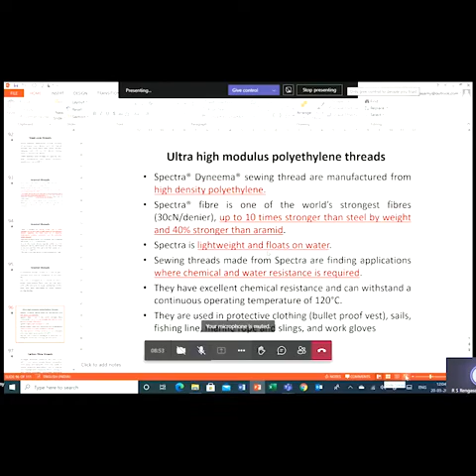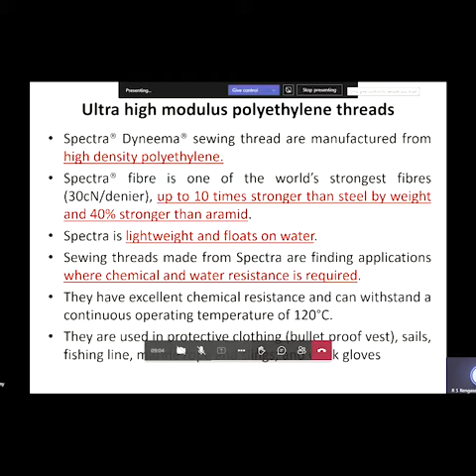So there is one category of thread which has very high strength. The polymer is called ultra high modulus polyethylene. And using this material, there are two companies in Europe and USA. They are marketing Spectra Dyneema as the fiber, and using these fibers, sewing threads are manufactured.

This Spectra fiber is one of the strongest, which has around 30 centinewtons per denier, up to 10 times stronger than steel by weight, and also 40% stronger than the aramid, especially the Kevlar fiber, the para-aramid fiber. And its density is very low. It can easily float on water. And another plus point is it has good water resistance and chemical resistance. Many of the chemicals will not affect this polymer. And temperature resistance is only up to 120 degrees because it has a low melting point.

And since this is the strongest material, now for the bulletproof vest, the panels are all made from this Spectra Dyneema material made from the filament yarns. So these panels, maybe 7 layers, 10 layers, they all have to be joined together by means of the sewing threads, so the Dyneema Spectra sewing threads are used.

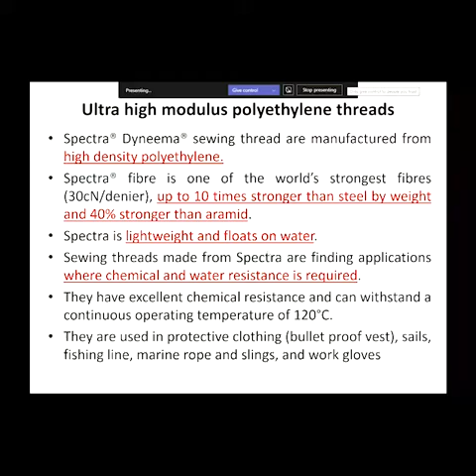Coming to carbon fiber threads, it is very expensive, and it is used only in the pre-impregnated composite. So already the textile structure or non-textile structure like 3D woven fabrics, biaxial woven fabrics of different configurations, are made using the carbon fibers, and this is called the pre-impregnated composite.

And this has to be joined together in the Z direction to get a proper shape and form of the composite. And finally, these joined materials are bent or folded into different forms to get the required structures with a particular shape. So the joining is done by the carbon fiber threads.

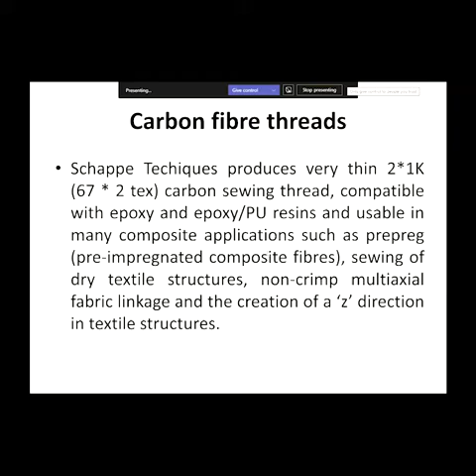Coming to outdoor applications, the most important thing is the material, the fabrics, the product is exposed to sunlight for hours and days. So one of the most important things is it is getting a lot of UV rays, and UV rays try to degrade the polymer. So for prolonged exposure, it is better to have a material which has high UV resistance, and the material has to be stitched by sewing threads which have high UV resistance.

Apart from that, the fabric and sewing threads are exposed to a lot of flue gases, oxides, humidity, and hydrolytic effect, alkaline effect of fly ash. This is all floating in the air, and that also tries to degrade the materials. So initially, all these sun protection textiles were made from coated polyacrylic fabrics. In the coating, they may use some chemicals which have good resistance against the UV rays.

And the main problem with the acrylic thread is they are not good against chafing. Chafing is related to abrasion. So these outdoor fabrics have to withstand a lot of tension, compression, pressure, chafing, abrasion, and bending. Unfortunately, acrylic threads are very poor in terms of chafing properties. So anyway, for improving the UV resistance, they always add some coating, which is called UV absorbers.

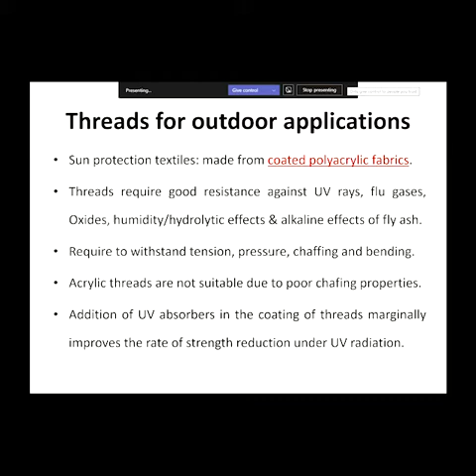Then people introduced the high tenacity polyester threads, which have better UV resistance than the acrylic threads, especially the high tenacity polyester, not the regular polyester threads. So the fabric also has to be high tenacity polyester fabric. They observed that if the fabric or thread made from high tenacity polyester is exposed for around 200 days, strength is lost by 55%. So that means you can't use it for more than 2 years.

So Amann is one reputed sewing thread manufacturer. They manufacture bulk products as well as specialized threads. So they have developed one thread called Tenara. This is made from expanded ePTFE. PTFE is one of the most chemically inert materials, and it gives the lowest friction because it doesn't have good adhesion with many of the chemicals.

ePTFE is basically expanded. There is a specialized patented process. After making this ePTFE, they do the extension, uniaxial extension, controlled biaxial extension. So they try to create different amounts of extension, and if the material is in film form, you can create nanopores by controlled extension in both the X and Y directions. And they are selling it at around 1,000 rupees per square meter.

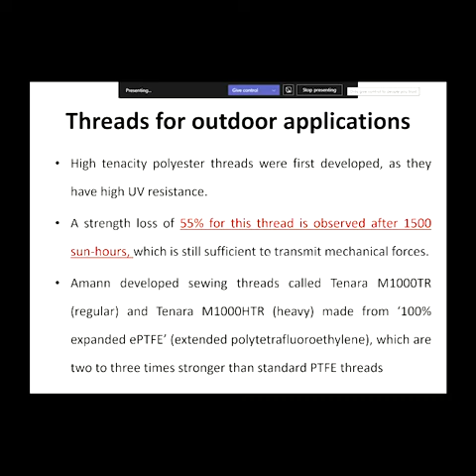So ePTFE, even PTFE, the other plus point is they have inherent chemical resistance, and they will not rot or mildew. But the same thing is applicable for acrylic as well as the polyester. There is not much difference. Only it has better chemical resistance and better UV resistance. And they're able to make PTFE in different colors also, which is very difficult.

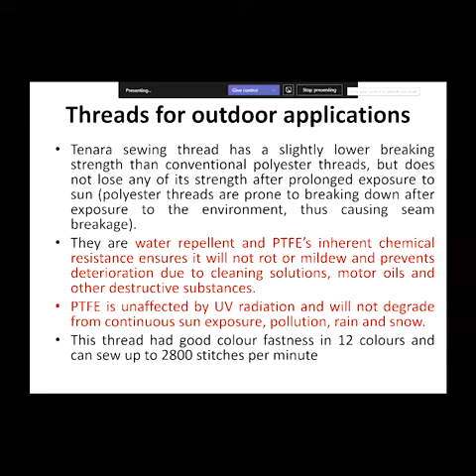And this thread can run at nearly 2,800 stitches per minute. Still lower, but it's a reasonably good speed. The main thing is they have less friction between the thread and the machine parts. So that is really helping to go for reasonably good stitching speed. Normally some machines go up to 6,000 stitches per minute. But 2,800 stitches per minute is not very bad because these materials are going for high-end applications.

So outdoor application, one is the awnings, another is the tarpaulins. Tarpaulins are always used to cover the material, and tarpaulins can be used in normal applications as well as in the sea, covering the boat, to protect from sun, wind, rain. So tarpaulins are used everywhere. It's basically to protect any items.

So here also one can use the PTFE threads or ePTFE threads. ePTFE thread is better than PTFE thread in terms of strength. So when you want to have a very high-end application where the strength is very important, then ePTFE scores better than the regular PTFE.

Coming to the airbag, airbags nowadays are universally made by automated multi-stitch machines. It's not done by manual stitching, because they want zero error. In Europe and the Western countries, an airbag is a must. You can't sell a car without an airbag. So when there is an accident, there will be impact, and with this impact above a certain level of force, the openings into the airbags open, and a particular type of gas at a little higher temperature is passed to the airbag.

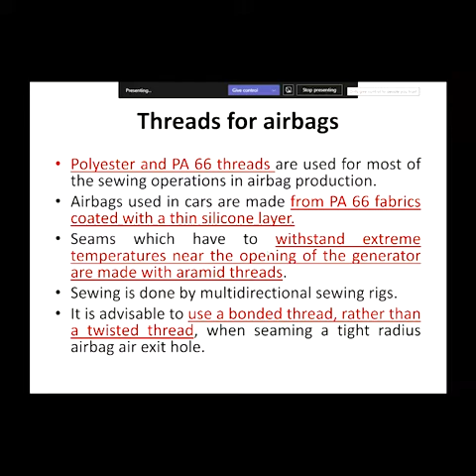So nowadays people have switched over from nylon. Earlier nylon 6 was used, then they moved to nylon 6/6. So the fabric is made from nylon 6/6, and the sewing thread is also made from nylon 6/6. Now the fabric is made from nylon 4/6, and the sewing thread is also made from nylon 4/6 monocord thread.

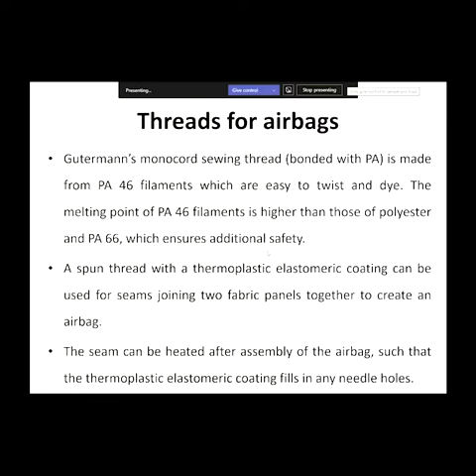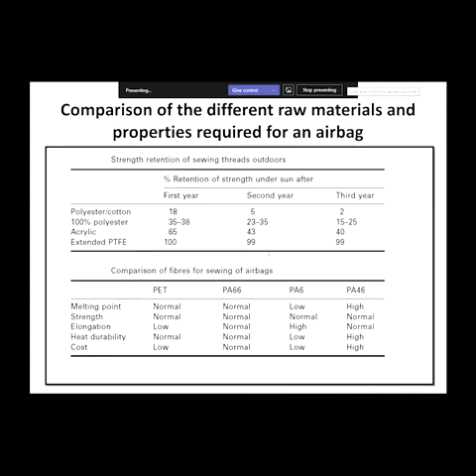Coming to geotextiles, you find a lot of applications. Geotextiles are used under the railway track and under the road and canal, embankment and many other applications. Okay, to control the soil erosion and allow the water to go in a particular speed. Okay, it has particular permeability to water.

So without geotextiles, you don't find any civil construction abroad. Any road you are constructing, it will always have geotextiles. Any canal lining, you have geotextiles because they have regulations. Without this one, people don't use. In India also, the National Highway Authority of India is now trying to enforce the use of geotextiles in the construction of roads. So once it becomes mandatory, there will be huge applications in India using geotextiles.

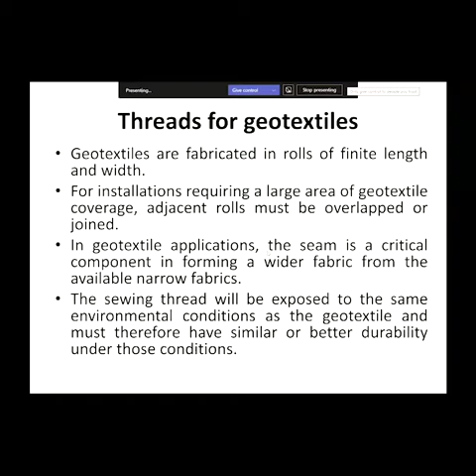So geotextiles are traditionally made from polyester and polypropylene, and it is universal in the USA and other developed countries. Polypropylene is the most predominant material because it's cheaper and more flexible than polyester. So invariably nowadays they shifted to polypropylene rather than polyester. Only in very demanding applications they use Kevlar, because the quantity is very large and cost is a major issue. So you need a bulk fiber, a commodity fiber, which generally means polypropylene and polyester. And it should be hydrophobic. So nylon is ruled out.

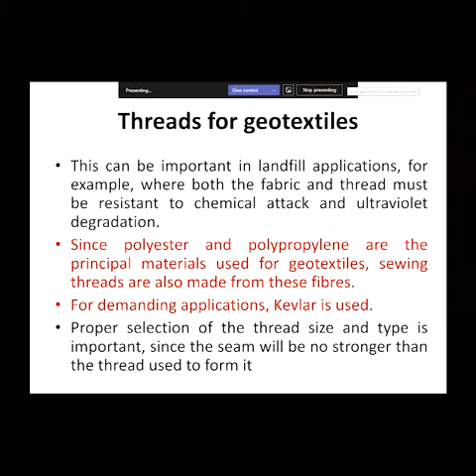So the geotextile fabric panels are basically only 2 meter, 3 meter wide, but you will be covering a large area, hundreds of square meters, even thousands of square meters. So all these fabric panels have to be joined. The material is mostly polypropylene, and the sewing thread used to stitch the panels is also polypropylene.

Then in the case of anti-static, there are some issues where you have to dissipate the current. If you're working in an environment very close to a transformer or a substation, there is always a possibility that static charge may develop, and if it is not controlled, if it is not dissipated, it may ignite and there will be an explosion in the working place. So the fabric the workers are wearing is constructed with conductive materials, and the materials have to be stitched by a thread which is very conductive.

So there is a specialized thread developed in Japan. They use conductive acrylic fiber, which has a coating of copper sulfide. It is a patented process. There is some 10% copper sulfide, which is a good conductor. The core of the thread is basically polyester or polyester cotton blend. So they are not using any steel. You take regular material like polyester cotton blend as the core, and on the surface you have specialized acrylic with 10% copper sulfide. So when the person is exposed to static charges, there is good earthing for the human body.

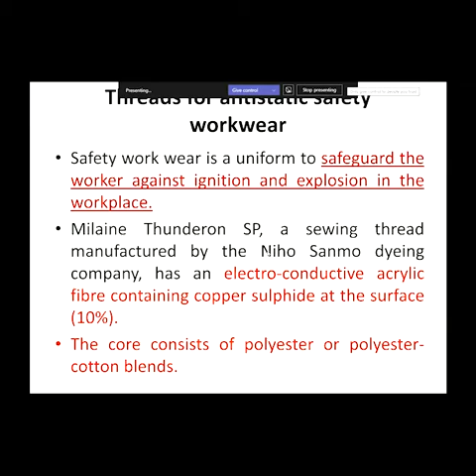Also, if there is a lot of static charge and you have costly equipment in the room, the machines may be damaged. So you need good earthing, not only for the covers used for the equipment, but also for the workers. So the above mentioned copper sulfide based thread acts as good earthing for the human body, especially during dry weather.

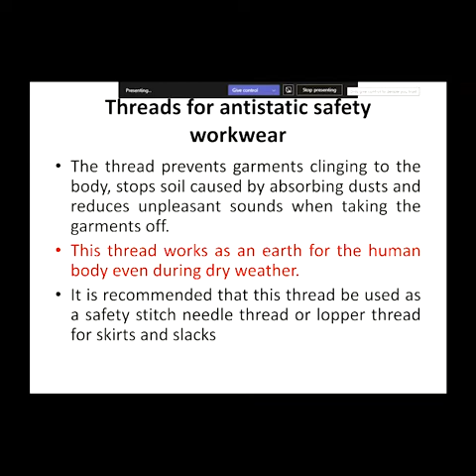Dry weather comes in Delhi in October, November, where you find almost zero humidity. So there is very little possibility of dissipating the static charges. If the air has more moisture, the static charge will be dissipated through that moisture. So it becomes very severe if you are working in a server room or near a transformer, especially in October and November, when the humidity is very low. It is quite dangerous. So it is advisable to wear clothing which is conductive, and that clothing has to be stitched by this conductive thread.

Coming to the final summary, we have seen so many types of threads based on the polymer. Spectra is used for high-end applications: fishing line, sailcloth, bulletproof vests, that is, protective clothing. And Kevlar, we have both varieties, Kevlar spun and Kevlar filament. Kevlar filament was used for airbags; now it has been changed to nylon 4/6. Kevlar also can be used for filters at reasonably high temperature, not 500 degrees, but in the 250 to 300 range.

Conveyor belts also need very high strength, so conveyor belts are also stitched by Kevlar threads. In demanding applications like geogrids, you need very high strength. So geotextiles come under the category of geogrids. They use Kevlar. And of course, earlier they were using it for ballistic clothing, bulletproof. Now, because of the availability of Spectra and Dyneema, people are switching over from Kevlar to Spectra.

And in the space shuttle, we need strength as well as charge dissipation. So they use steel in the core and Kevlar microdenier filaments covering the steel, which take care of the charge dissipation. During sewing, if it is only steel, it is going to degrade your sewing machines. Now the steel is covered with Kevlar microdenier fiber, which gives better gliding properties.

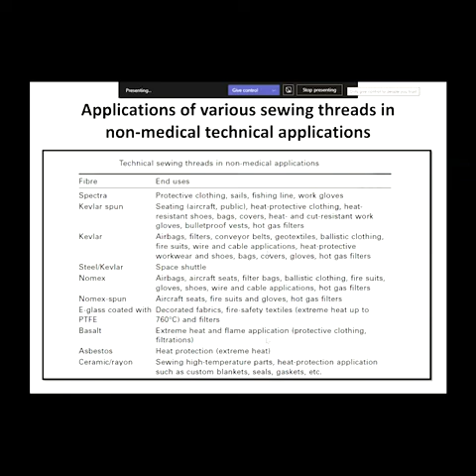ePTFE I already told, outdoor applications. PTFE, if you are using some chemical filtrations, has very good resistance against many of the chemicals, and it can be used. And PEEK, this is another high performance fiber. They are also used in some filtration, especially at higher temperature. The container bag is basically, on one side there is a lot of heat coming, and you need to create a system where it is contained.

Nylon 6 monofilament and monocord. Monocord is basically nylon 4/6 monocord. That's exclusively for airbags. And these are all used for automotive seat covers, bags, sporting goods, athletic equipment. In all these cases, there is a lot of abrasion, like in luggage. We move luggage here and there, it is subject to a lot of abrasion. So when the sewing thread is abraded, it will not hold the parts together. So in many athletic applications, you find the nylon monocord thread. Monocord thread means it's a multifilament and resin is applied. It's not twisted. Twisted one is not good because strength will be lower.